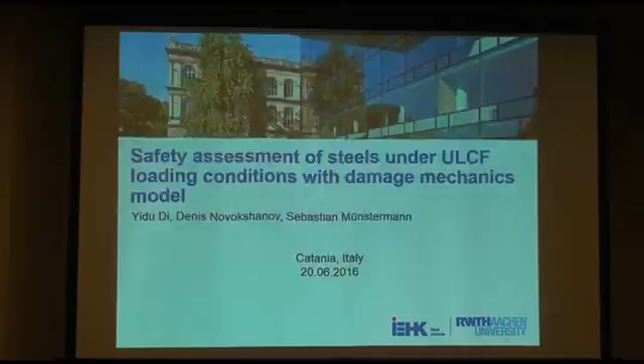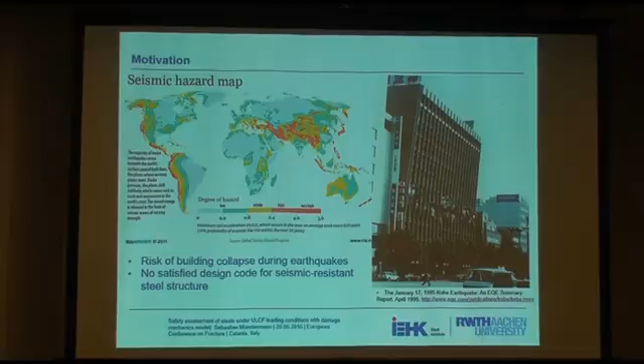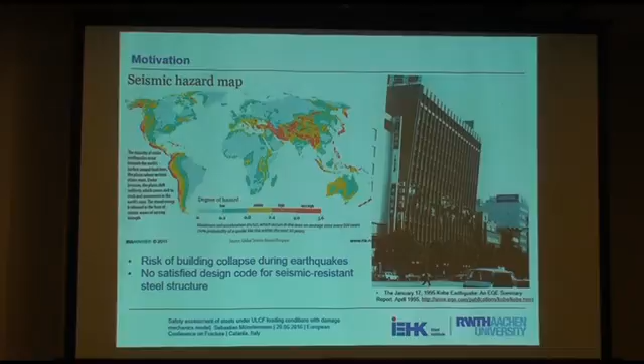The whole study was motivated by civil engineering. In many regions of the world there is high risk of seismic events, and there has been severe damage to many infrastructure applications all over the world. Unfortunately, if you look at different design rules, taking the European code as an example, there is usually only an empirical safety assessment available, which does not consider the toughness of the materials.

There is a guideline for the selection of the steel grade, but this is usually only based on the strength properties of the materials, and not explicitly on the toughness properties of the material.

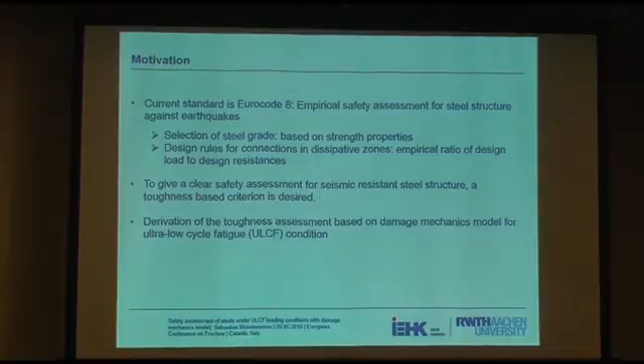In order to improve the safety assessment, we would like to define a toughness-based criterion for the selection of steel grades. For this, we also need to make use of a damage mechanics model that is able to predict ultra-low cycle fatigue damage.

The model itself shall be able to consider the effect of cyclic plasticity in order to have a good description of the stress-strain response under large strain amplitudes, or cyclic loads with large strain amplitudes, because we want to make use of a strain-based model, so we need to be sure that our calculated strains are really correct.

For the effective strain concept, we need to consider the effect of reversal loading on damage, because not every equivalent plastic strain will really contribute to ductile damage. So we need to make sure, or we need to invent, an effective strain concept.

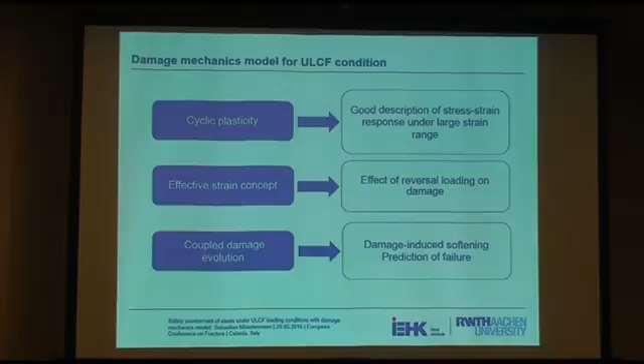And of course, we also want to take into consideration that damage will induce some softening of the component. For the cyclic plasticity model, we have made use of an existing kinematic hardening law.

It's the so-called Yoshida-Uemori model, which makes use of two yield surfaces. Both, in our case, are only described by kinematic hardening. Usually there's also the possibility to have isotropic hardening for the bounding surface, but we did not make use of this.

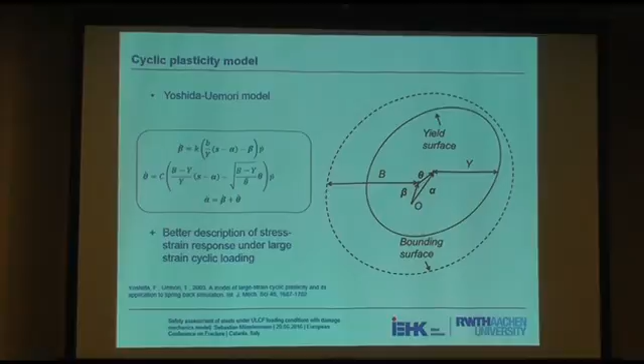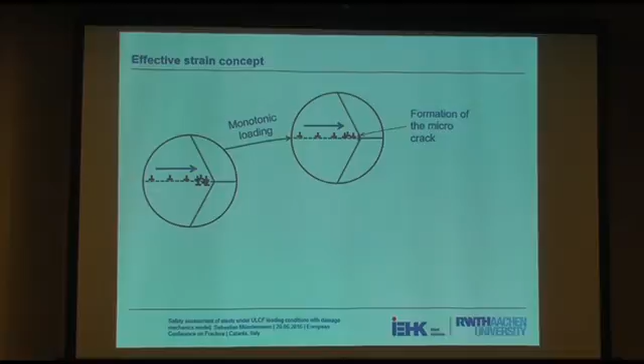The effective strain concept shall take into consideration that, in contrast to monotonic loading, where all dislocation slip will also contribute to nucleation of voids and formation of ductile damage...

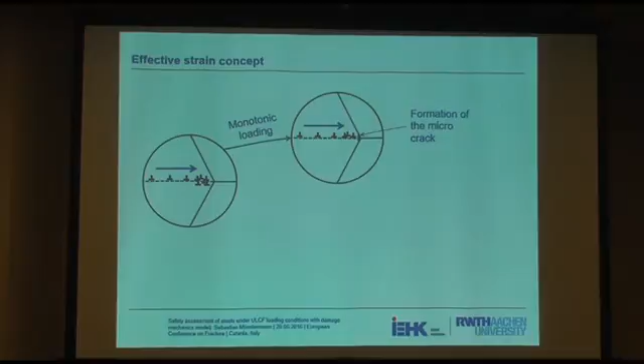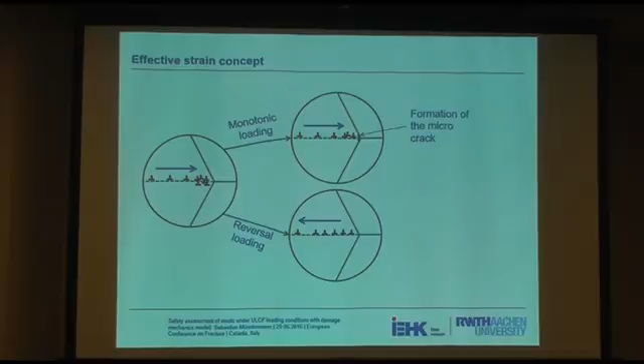In reversal loading, we can also have some kind of healing effect, because there's also a chance that the dislocations are slipping in the opposite direction. And of course, this has to be considered by the model.

So we have defined an effective strain measure. A very simple one, by the way. There are, to my knowledge, even more sophisticated ones in the literature.

Here we only said that our equivalent plastic strain only counts as relevant for ductile damage evolution when the stress triaxiality is positive, so when the material is under a tension load. All the increase in equivalent plastic strain will then also serve as an increase in effective strain.

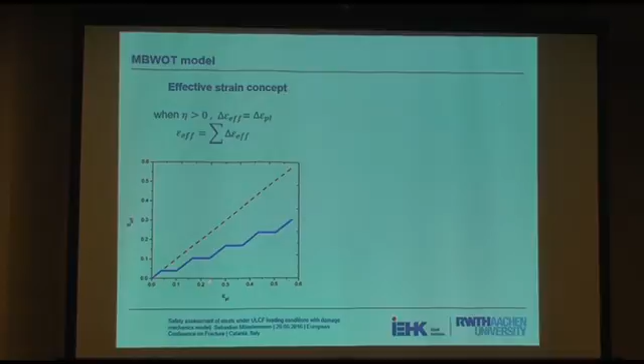So in fact, if you've got a plot where you have the effective strain over the equivalent plastic strain, you see that this results in a stepwise function.

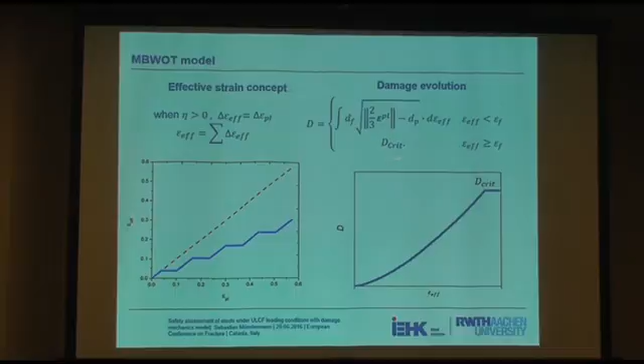And there's also a ductile damage evolution law. There's no threshold values, no damage initiation criterion, so we assume that ductile damage will initiate from the onset of plastic yielding, and it can increase until a critical damage value is reached, with a certain function to describe damage evolution in between.

Of course, we need to couple the damage evolution back into our yield potential in order to describe the influence of damage on the constitutive behavior. If we would only apply a plasticity model, we would always run into the hardening phase, but here there can also be a damage-induced softening.

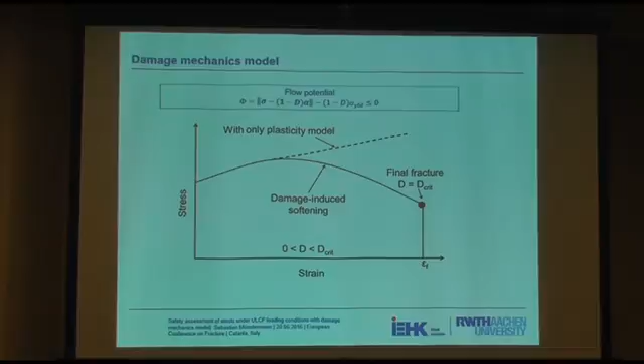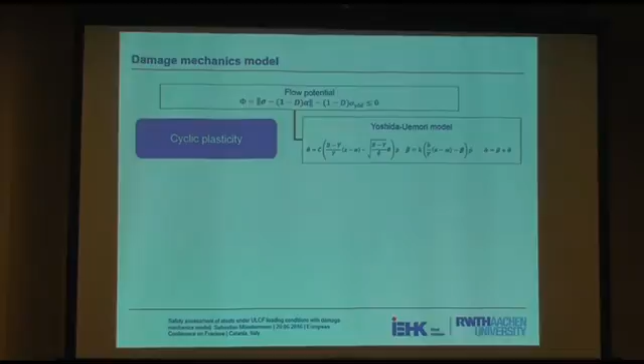This shall be expressed as well by the model. So for the cyclic plasticity, we have selected the Yoshida-Uemori model.

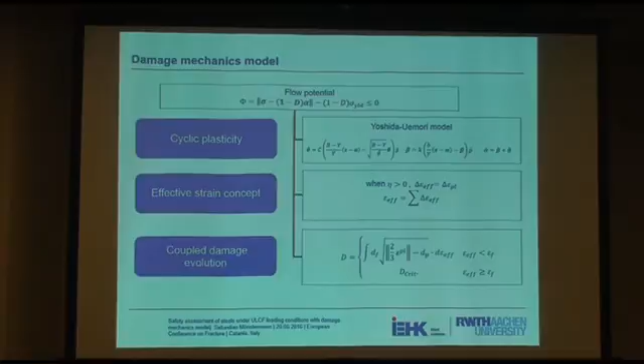There's the effective strain concept that I presented, and the ductile damage evolution law, and all this contains some parameters that need to be calibrated. All this has been done with the help of cyclic experiments with unnotched and notched specimens.

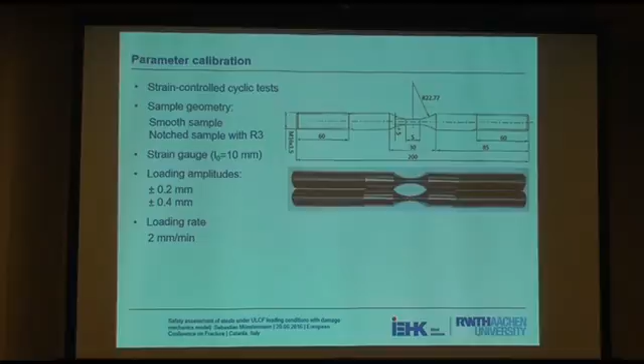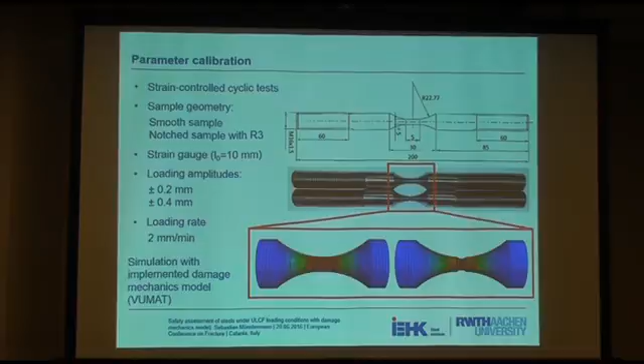We applied two loading amplitudes, plus minus 0.2 and plus minus 0.4 millimeters, at a rather slow loading rate. Here you see the simulation models that we used. The element size is quite small, it's 0.15 millimeters. The model itself was implemented as a VUMAT for Abaqus.

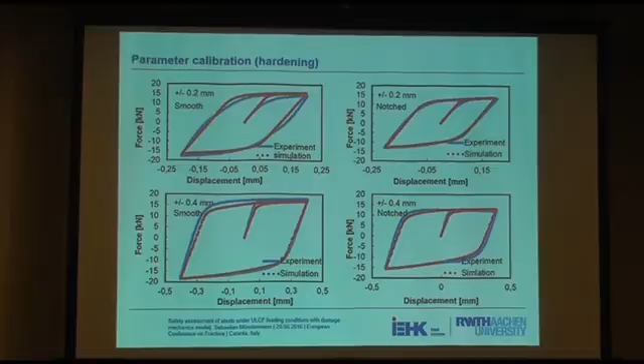And here you see some results of our material parameter calibration. There is already quite a good agreement between the experimental and numerical results in this case, but you should please consider that so far the damage evolution parameters were not calibrated, so there is no need to have a perfect match here, because damage evolution is not considered.

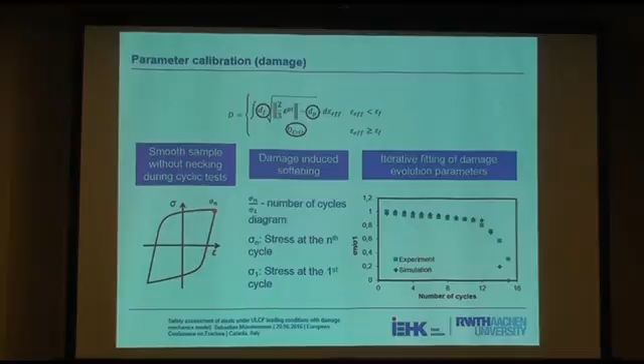This is then to be done in the next step, and here we also made a very simple approach to characterize the damage evolution during our test, because we simply plotted the ratio of stress applied in a certain cycle compared to the initial value over the number of cycles. So we could see how much, in this strain controlled or displacement controlled experiment, the strength of the material decreased, and of course this is a result of damage, and here we could calibrate the parameters of our damage evolution law.

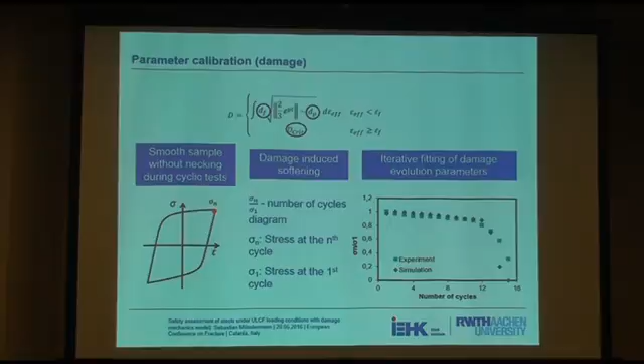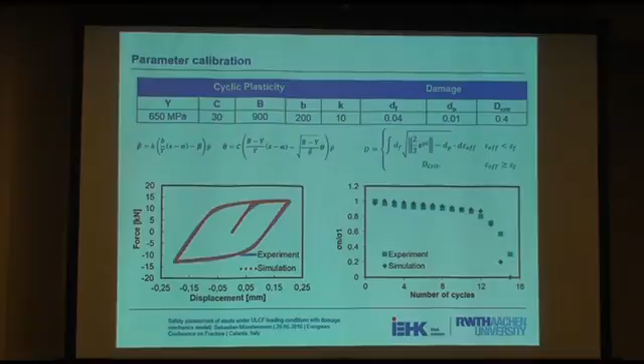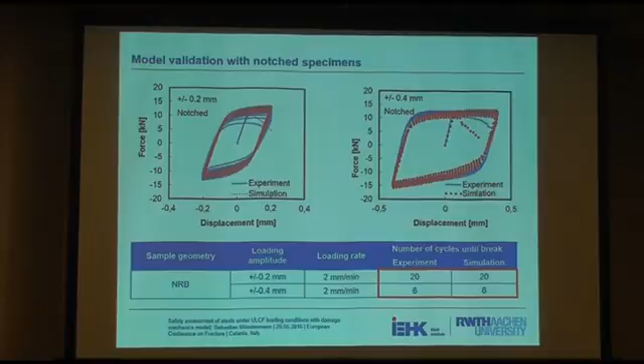Now the question is, how can we determine the toughness requirement? The idea is that first of all we show that our model is able to predict the behavior of a full component. Then, once that doesn't properly work anymore, we identify a set of damage parameters, a virtual set of parameters.

That will result in simulations in the desired performance of the component. So it doesn't mean we speak about the existing material anymore, but we really think about a material that would withstand the applied loads in a desired way.

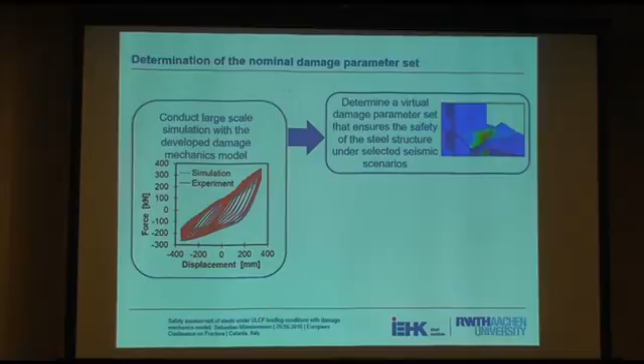So we invent a virtual set of damage parameters, and then we also use this virtual set of parameters to simulate a Charpy test. That is possible. I do not have the time, I guess, to speak about this in my presentation, but we've shown that this is possible. And like this, you can identify upper shelf requirements, toughness requirements for your material.

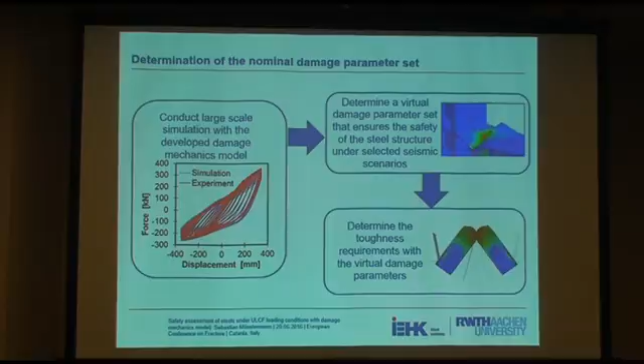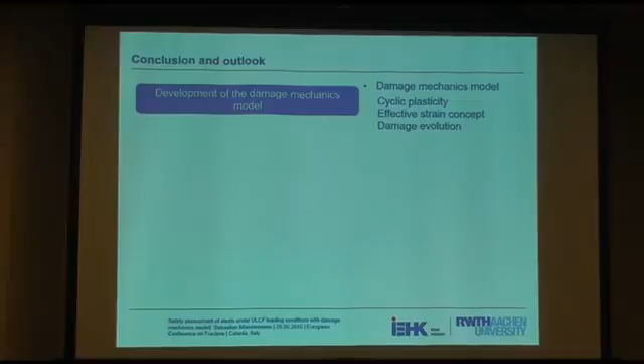So to conclude, I've spoken about the development of a damage mechanics model for ultra-low cycle fatigue. The core parts of this model are the cyclic plasticity model, the effective strain concept, and the damage evolution law.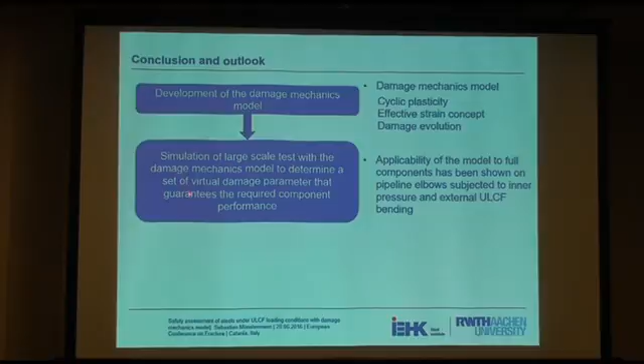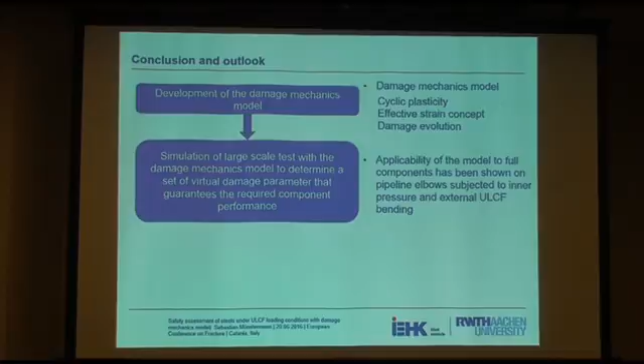The next step, if you want to derive the toughness requirements, would be to simulate the large-scale test with the damage mechanics model in order to determine the desired virtual set of damage parameters that guarantees the desired component behavior. Of course, you have to show that your model is really applicable to these large-scale structures.

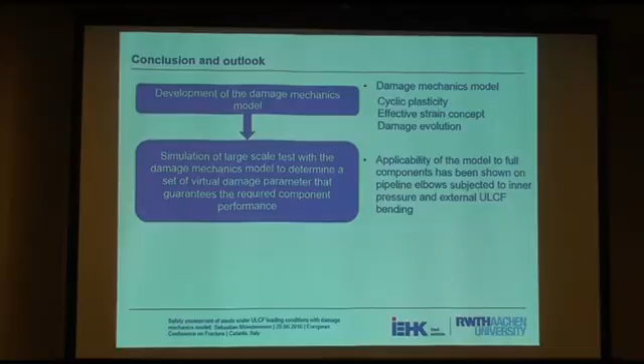We have proven this with pipeline elbows under inner pressure of 20 bars that were also subjected to ultra-low cycle fatigue bending operations.

And finally, as I mentioned, you can then derive the required toughness properties by simulation of Charpy tests. But it has to be noted here that I did not speak about any cleavage fracture criterion that also should be coupled into the model, to make sure that you don't have transition behavior, or at least that you are able to predict the case that you have transition behavior.

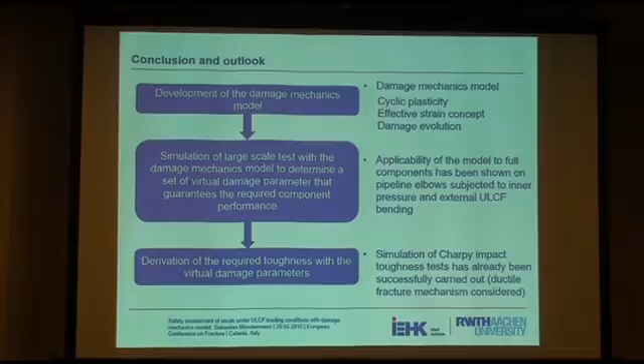And with this, I would also like to close my second contribution. Thank you very much.